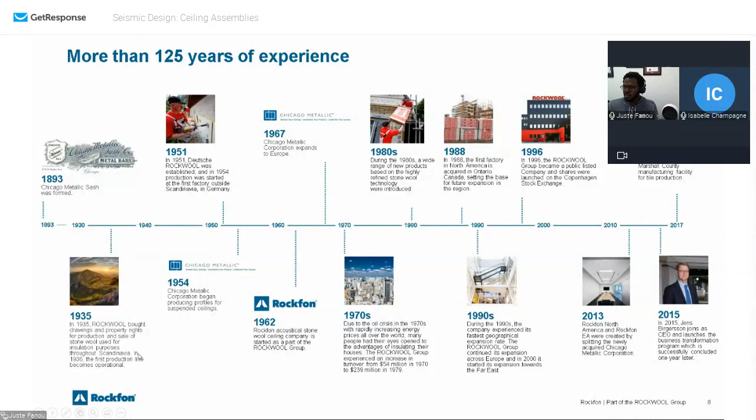Okay, I have a question. I don't know if I can minimize the screen where I see you without killing anything. No, I think you should be okay. Okay, how do I do that? With the little... just grab it. There's a little arrow on the side. Yeah, this here. Okay. Oh, okay. Perfect. Thank you.

So because the Chicago Metallic company already had an existing presence in Chicago, the Rockfon business decided to make Chicago the head office. So that means that warehousing, manufacturing of ceiling tiles, distribution, all the support that you think of, marketing and so forth, is based in the States. But for Canada, that means that we have a very good route truck and full truckload delivery system in place to cover every part of Canada.

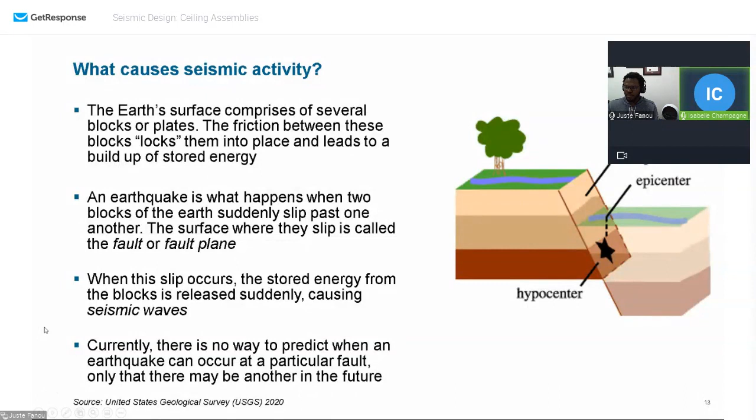But we are all connected now by television, by internet, by YouTube. So we see that there is activity out there. This is the basic of it. This is what's happening when we see these big shows of Mother Nature. There's been a need to, if you will, gather that information to know what goes on. Maybe not to predict things, but to have a better understanding of what is happening in terms of the earth moving and shaking and things changing.

So back in, I believe it was the 1870s, 1879, from my notes, the new government in the United States created the U.S. Geological Survey to try to track these things. So today it is a very, very high level organization. Their website is amazing. You could click on it at any time of day and see, within 10 minutes, where was the latest earthquake or volcano activity. It is quite impressive, and it really helps a lot of people figuring out what's going on out there without predicting, but at least being a bit closer to reality.

Next. So the Canadians do a similar kind of work. This, on our side, was organized around the 1800s, and it was actually McGill University that started this with 3 machines installed across the country. And they are gathering information, and they're trying as well with their U.S. counterparts to figure out what is going on to better address construction through building codes.

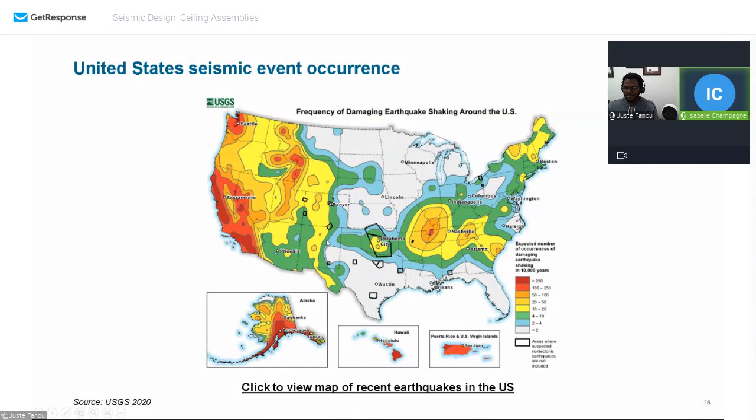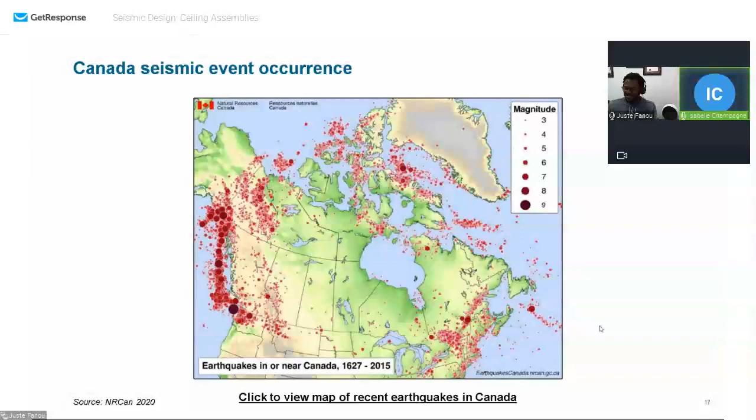And again, fracking was something that was discussed a few years back. Apparently, there's a possibility in the Gulf of the St. Lawrence River to go and access some natural resources, some gas and some oil. And there was that discussion about maybe using fracking as a method to recover these materials. And then the discussion kind of died because everybody red flagged that fault line, saying that might not be a good idea. So I'm sure it will come back again just because now the price of oil is up. So people will say, hey, there's money to make. You never know.

to create serious damage. So it's not just us. It's not just the Geological Survey that's looking into it. It's insurance companies. It's money. You can split this attention into specific things. It's either the structural components or what you call the non-structural components that would be affected. So it's about the 25-75 break. On the structural side, we're talking the actual concrete, steel, wood structure that could be damaged beyond repair.

On the non-structural side, it's everything that's inside. So it could be not very important to most people because it would be, let's say, office furniture. But think about your big data centers. Think about museums, collections that are valuable because of their rare items, the history they convey. If these things are demolished because things are shaken and broken, or because the shaking has ruptured a gas line and now you have a fire, you have things that are priceless that are lost. So that's where the reckoning of all this comes from, and that's where it's going, trying to prevent

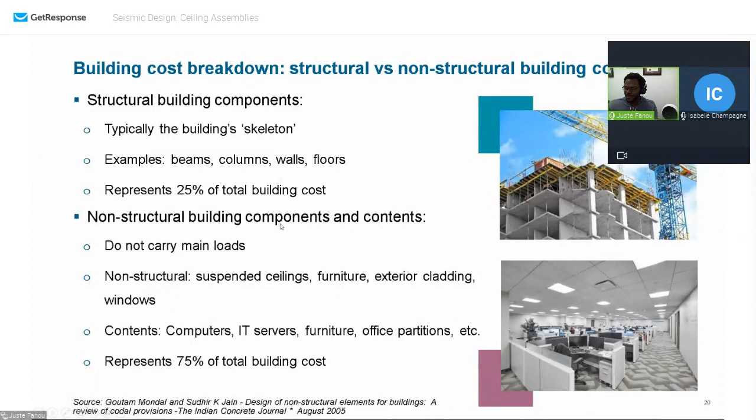all the damage. Yeah, and it's interesting to see that that accounts for about 75% of the building cost, right? It's huge. So we always think that if we don't lose the building, we're okay. But what's inside is just as valuable or even more valuable. Yeah. So you have a lot of people that said, well, at some point, okay, it's happening, we have to live with it. What can we do to prevent that damage?

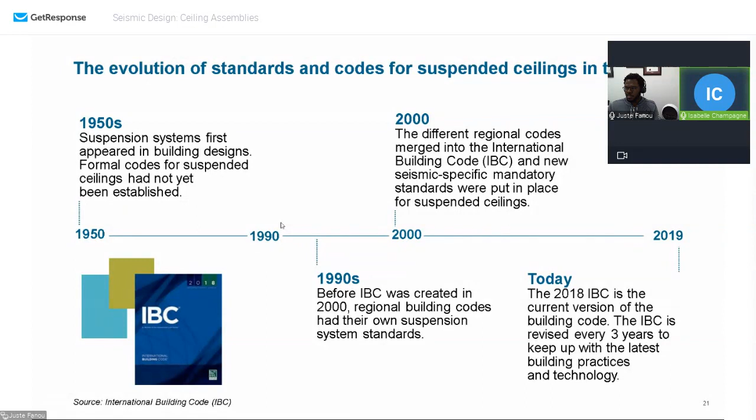So what do we do with this? Well, we try to create ceilings that will stay in place as long as possible. The idea is that it's not that the ceiling is the heaviest thing to fall down, but it will create damage. It will also create, in the moment it's happening, a blockage right before a door that is your exit, your egress. We're talking about this today in a very cold manner, but when this happens, we don't necessarily think, we react more. So a door blocked by a bunch of ceiling tile could all of a sudden look like a catastrophe.

I cannot get out, as opposed to thinking with a cold head, that you could just move things around, or walk over it. Yeah. But again, if it's the ceiling tile that falls, or the entire grid system that falls, there will be something there. And it's probably the first thing to fall compared to the rest. So for ceilings, it became more important to consider what could be done to prevent and mitigate that failure. And potentially the ceiling-mounted equipment too, right? So any light fixtures. Exactly. Yeah, all that was looked at.

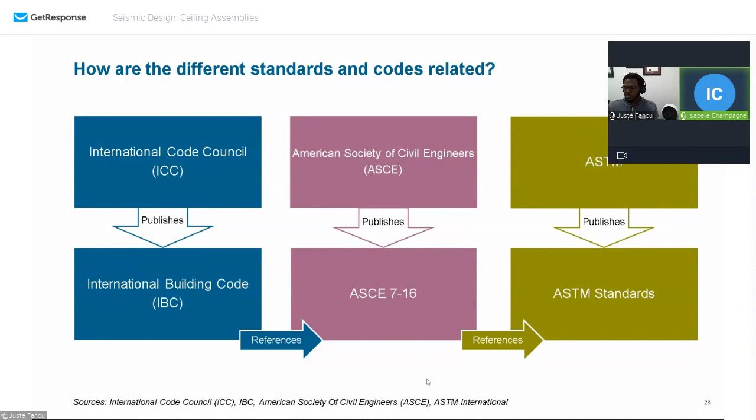So yeah, a similar thing also happens for Canada. Sorry about the question mark.

So very, very similar process in Canada, where we have the National Research Council, which publishes the National Building Code of Canada. And most of the architects on the call probably know this already. And we have each province that either publishes their own provincial building code, like Ontario or British Columbia does, which are usually based on the National Building Code, but they are so modified that it doesn't make sense to have them referencing back the National Building Code, or they just adopt the National Building Code as is.

So that happens at the provincial level, and then you have standard writing associations like CSA or CGSB, which is almost defunct now, that publish standards that are referenced by those building codes. And the same way ASTM has standards that are very specific to seismic requirements and for ceilings, CSA has a great standard, which we're going to talk about, that references basically what we call in Canada operational and functional components, which are essentially the non-structural components of the building.

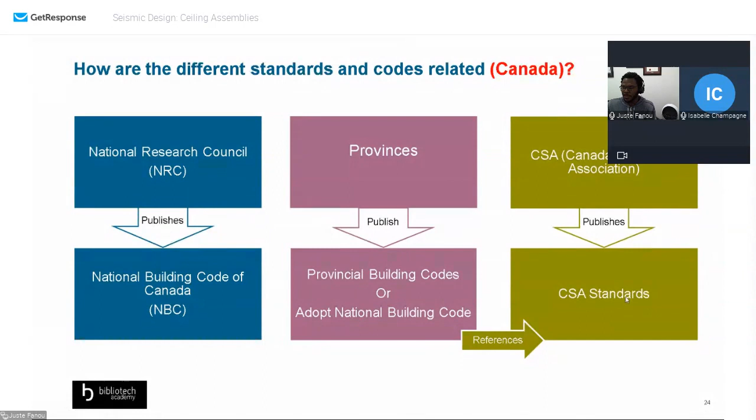Okay, so seismic. Sorry, I know there are a lot of numbers here, but I'm not trying to scare you. One of the big questions that I often get asked by either an architect or a building owner is, okay, how do I know, or when do I know that I need to have some kind of seismic restraints, or I need to take care of the non-structural components in my building? Because historically, it's like, okay, it's seismic, it's earthquake stuff. Don't worry about it. My structural engineer is going to deal with it, right?

That has generally been the approach to these things, until, as Isabelle has said, we realize that, hey, if you have the ceiling falling on you, it's not such a good thing. Or if you have ceiling mounted equipment that fails during a seismic event, that's not a good thing.

So there's a clause in the NBC, and you will have a recording of this presentation, and it's clause 4.1.8.18, sentence 2. And it basically says that for buildings other than post-disaster buildings, and a post-disaster building is essentially any kind of essential facility. So the first thing we think about is hospitals, right? We want hospitals to remain available if there's going to be a lot of sick people. If your hospital is down, then you have bigger problems.

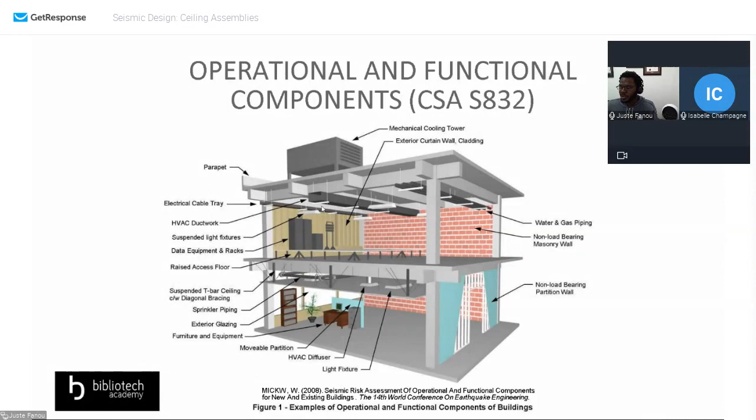So what exactly does the code require you to restrain? There's this table in the National Building Code, and it's replicated in a lot of provincial building codes as well, called the elements of the structure and the non-structural components and equipment. This is basically the list that the code requires you to restrain. As I was saying, we can start going on and on and basically restraining everything. But I think there has to be a balance between how much it's going to cost and what the risks are. That has to be decided on a project by project basis.

But codes are jurisdiction, so as a minimum for the building to pass basic legal requirements. And again, this is the bare minimum, the bare life safety minimum. You can go above and beyond that. If you need restraints, these are the items. The good thing about this list is that it's organized in a logical way. The first 6 items are all structural items: exterior and interior walls, cantilever parapets, things that would require structural design.

Items 11 and on are all mechanical or electrical type items, and the mechanical engineers usually have pretty good sections on seismic restraints. 7 to 10 is really what you need to worry about as an architect or a designer. These are the components under the purview of the architect or the designer: suspended ceilings, light fixtures, and other attachments to ceilings with independent vertical support, masonry veneer connections, access floors, masonry or concrete fences more than 1.8 meters tall. This is essentially what the code needs as a very minimum. But again, this is the bare minimum.

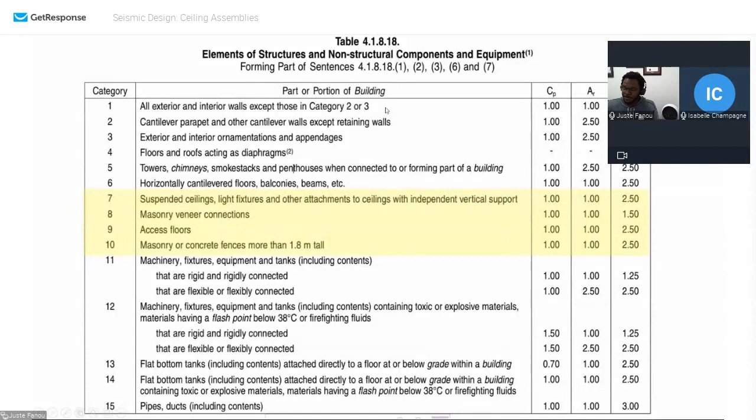But basically this is what the code requires, and this is found in table 4.1.8.18 in the National Building Code. So that's what I wanted to talk about.

I didn't want to confuse anybody, but I think that it's important to make the distinction of when do I actually need this? And not necessarily solve the problem, but definitely start the conversation with the structural engineer if needed.

Yeah, and there was a question in the chat room from Leah about acoustic clouds. Yes, they would require restraint. So that's why sometimes it becomes a beautiful element of design that becomes extremely ugly because of all these additional restraints. Depending on the region and the type of building and occupancy, it could become something where all you see is a bunch of wires and posts, and it's just not worth it. So those are the things to consider. We like clouds, but sometimes clouds don't like seismic. It's just reality.

So back into standards and the more nitty gritty, if you will. The standard C635 is about manufacturing, testing. What is it that you have as a T-bar? What is it that you have as a lay-in panel? And how, as a manufacturing company, you should meet specific requirements depending on where it's going to be used. So we're talking here acoustical tile, but as a lay-in panel, you can also include a metal pan. So it's an aluminum or a steel square or rectangle that would lay in the suspension instead of an acoustical tile. And then that goes down the road of anything metallic that is laying in a suspension. So it could be an open plenum concept, not just a solid piece of metal. So anything that is using a T-bar that could be considered a lay-in panel will be included in this.

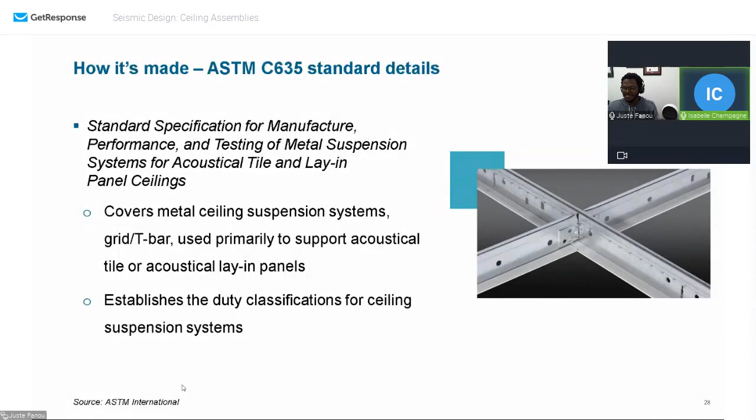Yep. The next one is C636. Now that's about installing it. What is it that you do with it? So again, it's a standard procedure in terms of what the expectations are and what you would like to do depending on the height of your substrate above. What you can or cannot do for hangers, how to do it, how and where your ceiling fixtures could connect to that suspension or not, with a separate or additional safety feature for seismic, for instance. You have additional safety chains that are added to it.

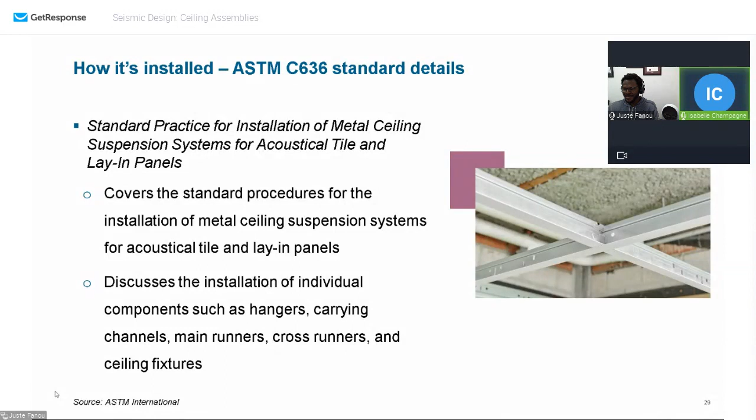There are great documents from associations of contractors that have been developed over time that give you very quick and dirty ways of looking at it. And there's also associations of contractors that give training for contractors doing interior finishing on how to do these things, how to recognize the system from one company to the next and what's the best practice about all that. Again, something that is worth always listing in specification. Not that anybody knows or recognizes it, but Juste and I, we know that, we see that, and there's a lot of worth in that standard if we need to dig into it.

And then we have the ASTM that is specific to seismic activity. So this will go into the detail of what you need to do for securing your ceiling, depending on the risk level of seismic activity. And again, depending on that level, what are the different connection strengths and what are the limitations that you may have.

It's a lot of times related to thinking about, I always say, what my grandfather would have done way back when he didn't know any better, but he had that good common sense that there's a basic element that needs to be addressed. So now we have categories, we have numbers, we have classifications, but a standard is about a consensus, a best practice without going into one element versus another, but trying to convey as much information as possible. So they get updated every so often. Okay.

The Canadian codes had for the longest time a numerical system for classifying seismic risks: 1, 2, 3, 4, 5, 6. I think it went all the way to 9. Things have changed and evolved a little bit over time.

And what we have seen is that a lot of times, because manufacturing companies have documentation that is based and produced in the States, we have a lot of times engineering in Canada that will connect the dots from a Canadian building code to what a manufacturing company will provide as data. So I will go about these classifications, but you will see where, like I said, my grandfather's common sense gets into play.

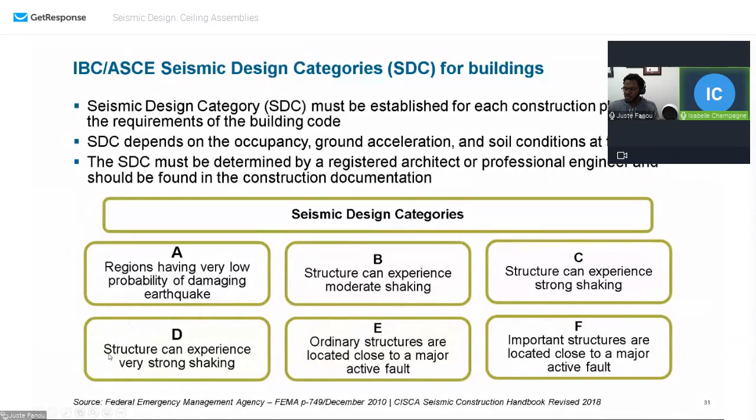Okay. Isabelle, can I add one thing very quickly? Sure. There's one thing that I forgot to note when I was speaking: there are three main things that affect your seismic level of risk. There's the type of building, and I spoke about that a lot, but I got a little bit carried away. So are you doing some kind of warehouse that nobody's ever going to visit? Or are you doing an important hospital or a police station or a fire hall? That will determine what level of mitigation you need.

There's the type of soil. If you're building on very strong soil, like bedrock, that might not affect how much the building shakes, versus if you're building on something like clay. And then there is the location. I think we've covered all these things, but I want to put them together. If you are in Vancouver, even if you're doing potentially a warehouse, you might still need seismic bracing because there's more susceptibility of the ground shaking in that location than there would be here in Toronto, for example. So those are the three things that affect seismic restraint.

So that's why it's not always so straightforward to just say, oh, don't worry, we're just in Toronto, we'll be fine. It could be a hospital in Toronto, it could be a data center in Toronto, or it could be a warehouse in California. So you always have to keep that at the back of your mind and ask the question. Yeah, that's it. Okay, no, that's good.

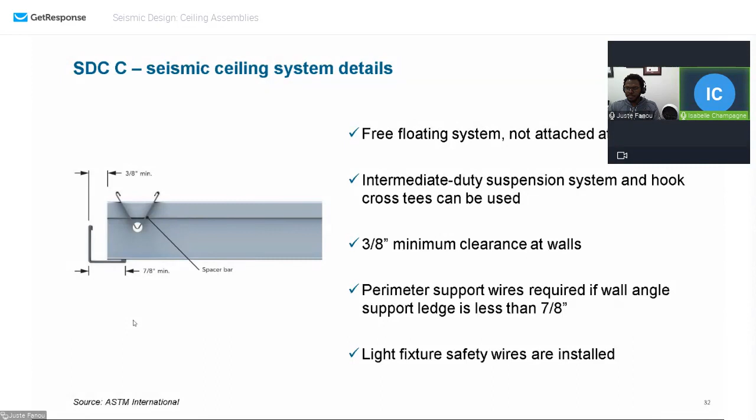So if there's a shake of the building, the ceiling will move and lose that energy by moving a little bit without falling. And because we're talking seismic, the light fixtures resting on the T-bar cannot be solely resting on the T-bar. They have an independent connection. It's not just the wire; it has to be an additional support.

When you get to D, E, F, where things are going to shake left, right, up and down at a higher speed and higher strength, the connections need to change. The testing in place says that manufacturing companies have to prove their system works with very specific items. So your main runners become heavy duty, with more weight to them, and the pull strength of the connections has to be a minimum of 180 pounds. So all that connected, when you pull on it, should resist up to 180 pounds. These numbers have been there for a long time. Every manufacturing company in the marketplace that makes those things will have these tests.

All of a sudden, though, because it shakes and moves a little bit more, we need to do additional things. So that wall angle becomes a very ugly 2-inch wall angle. If you were to look up, you would see at the edge of the wall a large piece of metal, not your standard, very elegant little wall angle. So this, again, is standard practice. I don't have anything specific in my hands. I deal with things that exist, have been around for a long, long time, and are recognized. Any building inspector would recognize it as a very large wall angle doing what it's supposed to do.

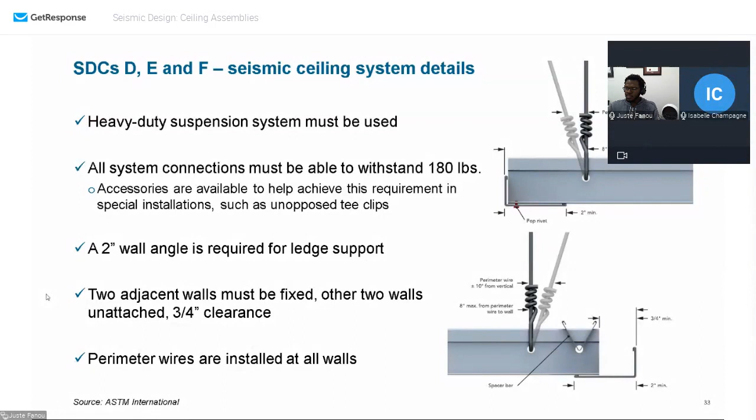And then you get to the ugly stuff. So this is where your clouds don't look good, because you have to think about this energy that's going to go up and down. So you need some kind of a post, the different things that can be used. A steel stud can be your post. And then you have your 45-degree bracing. So these things, for instance, would become very visible.

And I know that for a fact because we did that at our company. We did a showroom and we did something with all that bracing on a cloud. And there's only so much you can do to hide this. At some point it's in your face. So this is the negative side of things. When it's wall-to-wall ceilings, you don't see that.

Also, what happens here is that because it becomes such a high energy, you have to think about breaking it. And yet another manner to control that is by creating an expansion joint, if you will. So now you have to say, okay, there's so much square feet to my ceiling, I have to give it some breaks. So you have smaller pieces of ceiling moving, because the whole thing becomes this gigantic tsunami of energy that comes into your ceiling. So you're trying to control that. You break it down into smaller pieces.

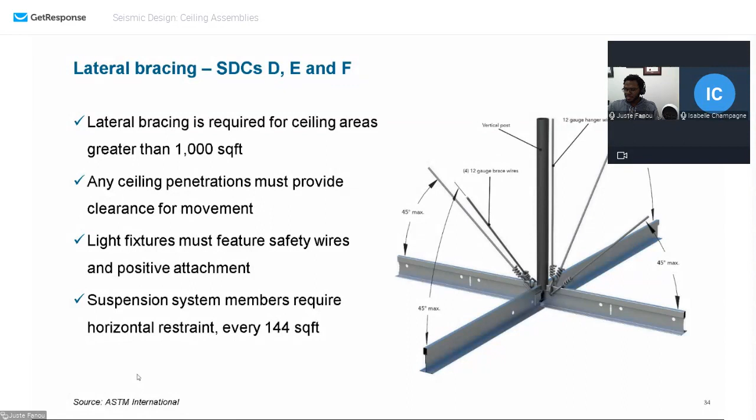Next. So that's where at some point there's some rules in terms of the square footage. Okay, I'm trying to think of the word in English. There's a scale, not a scale, but a measurement that you say from one part. So 25% of your ceiling versus 75% of your ceiling need to be calculated in such a way that it's not a long, narrow alley of two tiles going for like a mile long. You have to break it down into more squarish dimensions.

And then it's a ratio. Thank you. All of a sudden the word comes back to me. It's a ratio. So there's a ratio of 1:4 that you need to address in terms of very large-scale ceilings. And again, a data center would be an example where you would have a very large ceiling that is uninterrupted. So my grandfather back in the day would say, okay, I understand I need to create a break and I don't have fancy things with me.

So I'm going to cut through the main channel or the cross tee, depending on where that line has to fall in terms of expansion joint. And then I will try to make it pretty, because if you look up and you have a big break, what is it you're going to see? So you cap it, and then you have a piece of metal of some sort at the top that is actually closing that gap. So visually it's not as bad. And it's also the piece of metal that will bend during that big, huge movement and shaking of the ceiling. So it will be absorbing that energy and hopefully be enough that the whole ceiling is not going to collapse.

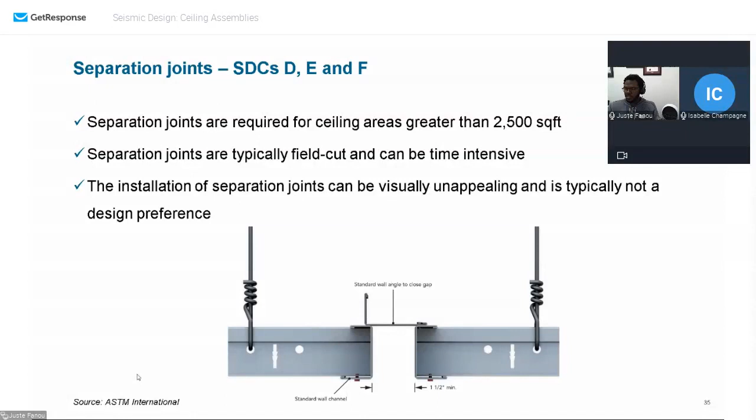So the alternative seismic solution is what manufacturing companies will propose and will test and will publish as options towards all that stuff we were just talking about. So for instance, you will have, through third-party testing, very specific clips that will be promoted to be used as part and parcel of what a manufacturing company will have. So everybody in the marketplace has a report of that nature.

So again, we see now that the ASCE, which is the civil engineers in the States, are part and parcel of this testing. You get that information laid out, and then you go to a company like Intertek, for instance, to actually have a test in a laboratory. And then you can get your results published. So the results are basically up-to-failure data, right? The tests are always all the way to failure point. So you know with these documents what are the strengths and the limitations.

So in terms of the span that you are allowed to have in between specific T-bars in order to meet those requirements that are in the seismic standards, for instance. So it's all coming together, if you will, at some point.

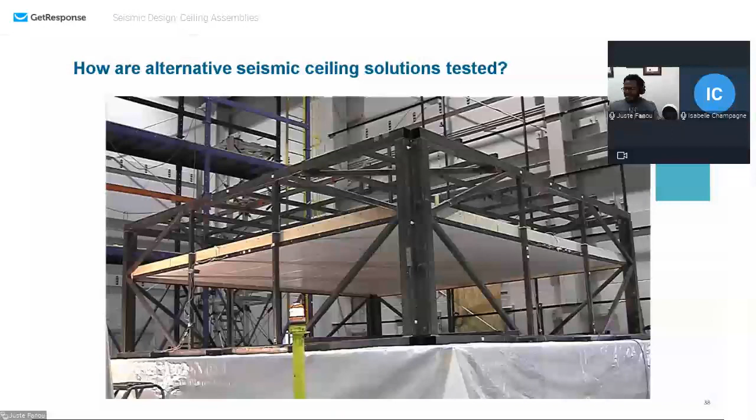Okay. Oh, we're slow here. We're gonna catch up. Okay, I see the time.

So why would you bother with all that? You're gonna say, well, the heck with that. You might as well not put a ceiling if I'm gonna go through all that. Well, the thing is that ceiling is acoustic first and foremost, so you may want to consider that you want to keep your acoustic. You spend a ton of money in terms of beautiful design, so maybe your ceiling is part of that design. It's a plane, right? It's another wall, if you will, so you want it to be part of it.

And when you look at all these different aspects, and you've made that consideration that you will have an acoustical ceiling, if you go with the alternative solutions that are proposed by manufacturing companies, you have some cost savings because it's like best practice. This is my clip. This is what it's going to do. This is how you can install it. It kind of simplifies instead of the guessing we saw earlier with pieces of metal that you're going to bend because you have nothing available to you.

So a clip would be that connector for the wall, the perimeter wall. It's something that everybody has. It's a great way to easily install a suspension ceiling at the wall, whether you need to have 2 walls attached or 4 walls detached. The clip allows for all these possibilities, allows for that movement. It's resistant enough that it holds the T-bar. It's clipped to the wall angle and to the T-bar, so effectively it should not move in a category C and should eliminate the, what were you going to call that? The spacer bar that we saw earlier.

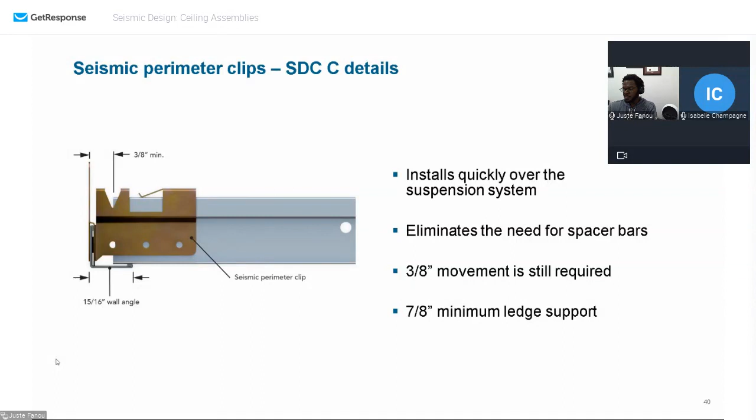The spacer bar and the clip, they both have advantages and disadvantages. When you think about your ceiling tile, they are in the way a little bit. So you have to plan a little bit for that. These pieces may make it a little bit slower when it's time to install the acoustical tile itself. Okay.

And if you go to your D, E, F, which is the level of higher risk of seismic activity, the idea again is that you need that connection to the wall. You need that spacing for movement. The difference being that on the attached wall, your clip would have an actual pop rivet. It would be screwed in, and it would give you a chance to control things. And it also has the advantage of being tested and approved for a standard wall angle. You don't need to have your 2-inch wall angle. So it's nicer when you look up.

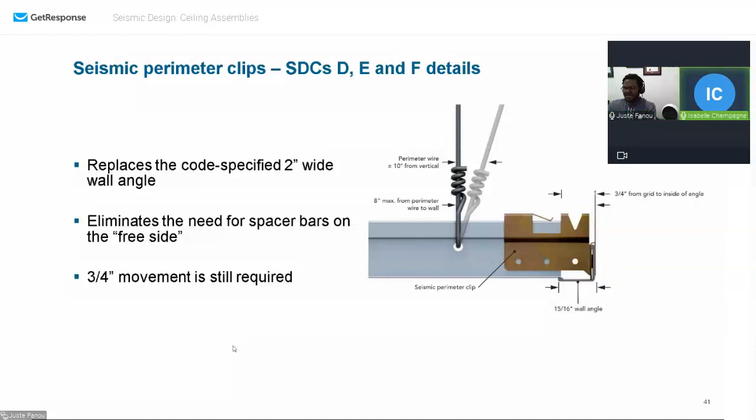Yeah, and the funny thing about that, just very quickly, I know we're over time, but I actually did a hospital in Vancouver, and I think this is before all these kinds of clips were very popular. So we had to do the wall angle, but the interior designer was very, very disappointed because she was like, well, there's this huge 2-inch angle everywhere, and I'm always looking at it. So that was interesting to see, and we wish we had those solutions when we were doing that hospital. Yeah, you can imagine in a hospital, a lot of small rooms still need to be addressed. So you have an awful lot of that white piece of metal in your face all the time. So yeah, I can imagine. Yeah, she was not happy.

Yeah. And then for that expansion joint, there are separation clips that exist. Again, manufacturing companies go and test these things. Everybody has their own way of doing it. They are very different from one company to the next, but they all give you the opportunity to cut through the main or the cross T, depending where that line should fall, and give you a chance to adjust things and cover that gap and give that movement that you need.

The best way to know whether or not you have an expansion joint is when you look, if you see a little capping that covers your T-bar, and each T-bar has that at the same place, and it creates that little line that all of a sudden you visualize, and you know it's the expansion joint that's hiding behind that little capping.

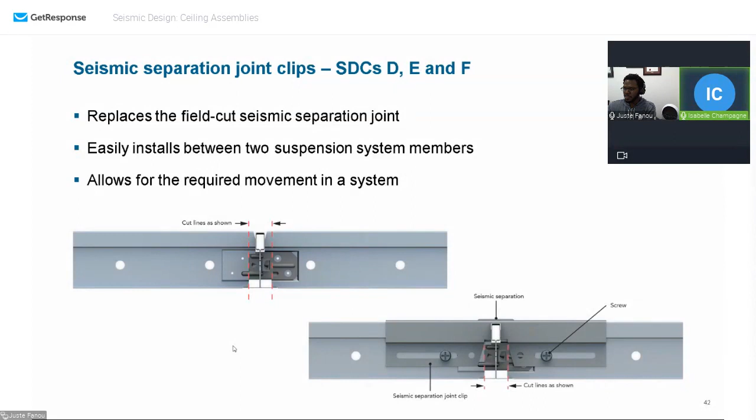Okay. Where are we? Okay.

And at the end of the day, who will enforce all that? Depending on the province, you will have more or less of these building inspectors. In Quebec, apparently there's less of them. In Ontario, we have a lot of them. But they are the ones that know the building code.

They will be asking questions about that clip and that expansion joint. And what is it that you have there? Why did you pick this one? They will be the ones asking questions for documentation. So don't hesitate to ask manufacturing companies for that.

Okay. Quick summary, because we said a lot of things. So 75% of the building is where you will have to think about what is it that's going to fall on me or towards me or below me. What is it that we have for seismic standards? We have a lot. They've been in place for a long time. They do an excellent job at creating quality material.

What do I need to worry about? Where is it built? What kind of building? What kind of occupancy? So sometimes you have a red flag. It could be one day you're doing a high school, and the high school is a post-disaster. Not just hospitals and fire halls, but high schools. High schools have large gyms. They have shower rooms. They have cafeterias. They're great places to relocate people.

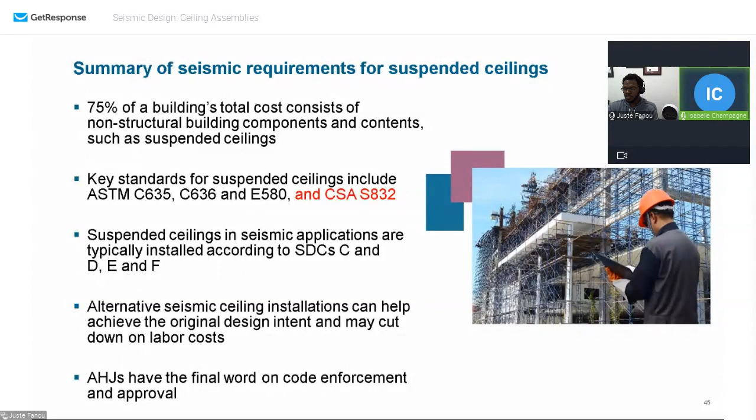Okay. Do we have another slide? I think we do have a couple. Almost done here. Steven says he had to go. Bye, Steven.